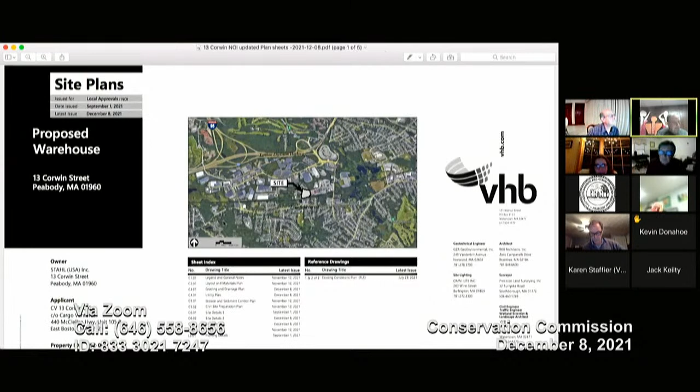I received an email from Will dated yesterday, the 7th, and I haven't had a chance to go through everything in it yet, because there are pages from Horsley Witten and pages from the peer review people. Whatever's in the OneDrive is accessible to the public and to us, but this wasn't submitted in time, and there's an issue there for me.

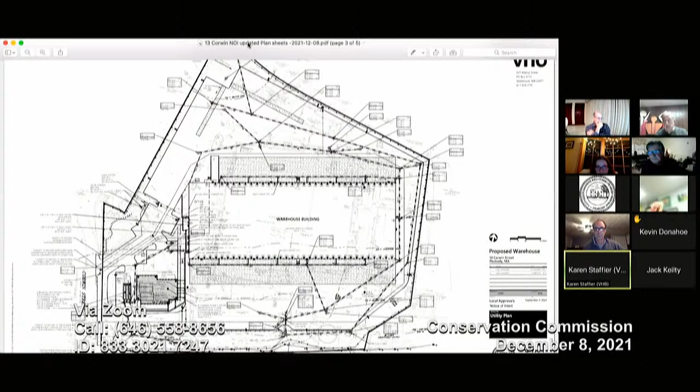Hi Karen, this is for the one you were looking for. If you scroll down towards the bottom of the page, there's a manhole. It's in the dead middle. You can see a pipe arrangement just to the left of the big circular tank that's going to be removed.

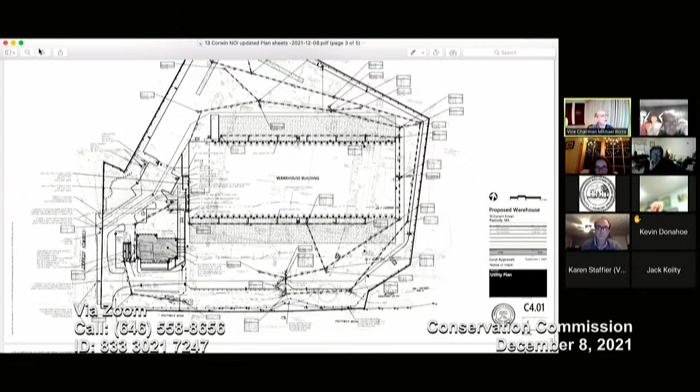If you zoom in on the bottom half of the plan, it's right near the brook, there's a little squiggle that says flow on the existing conditions. That manhole right there is the manhole in question. So you can see drain manhole 37 was the one that previously some of those just said out instead of 11 or 14.

Now each of those, for example, the first invert has a label, the invert equals, then the invert itself, then a description, and that description describes very clearly, as the commenter is asking for, what direction or what structure the pipe is coming from or going to. So for example, that first one says invert, and then it says 11. That means that's the pipe coming from structure 11 into drain manhole 37.

Yeah, that's my plans show that. The plans that I have, I have these plans. So the plan I'm looking at shows on the drainage, on the utility plan, drain manhole 37 with the outlet pipe shown in the direction. Here. Yeah. So I have this because I reviewed this stuff today.

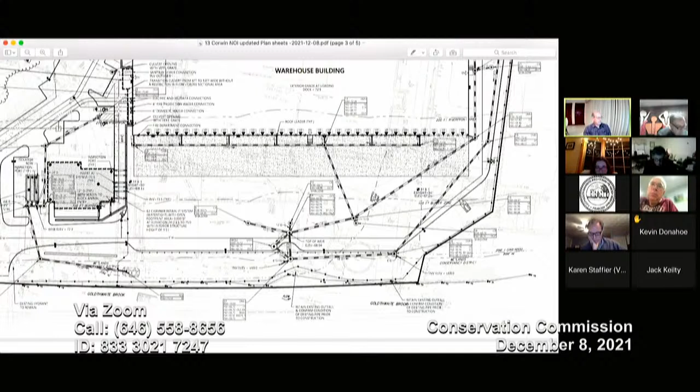Okay, not that I'm trying to speed this up, but if I could simplify it. Going through all of these comments, there's quite a few. I think I come up with eight of the comments where the final answer from Horsley Witten was not 'no further comment' - they still had either a comment or what they had asked for had not been provided. And those, if you wanted to jump to those, that one being the first one, you can stop me if I'm speaking out of turn. So standard number 2 was the first one where there was not a final no comment from Horsley Witten. The next one wouldn't come until you get down to standard number 3.

So are you going to respond to these rather than me read them? Maybe you should. Sure. So standard 3, no further comment, no further comment, no further comment, no further comment. Yeah, so I know standard number 3, Horsley Witten had no further comment.

I guess the answer was about having soil testing, and the applicant has agreed for additional soil testing prior to construction of the subsurface infiltration system, per comment number 6 of the applicant's response. And Horsley Witten has no further comment. Yep, so the reason I'm highlighting that to myself is...

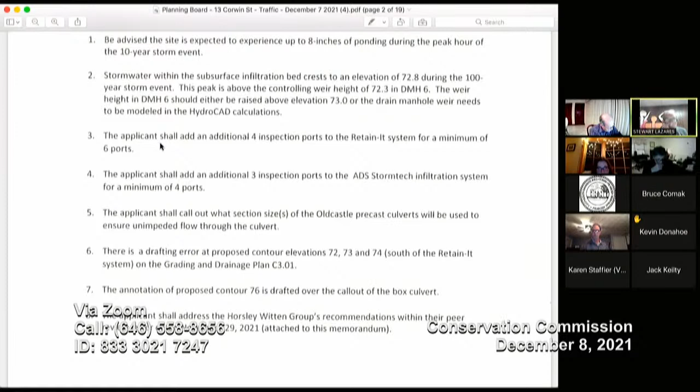What's the date of that memo? December 7th. The memo from Will is right, but this letter was completed November 29th, from Horsley Witten and WorldTech. So sequentially we responded to them, and we tried to bring that forward last meeting, but we were late in terms of deadlines for response. So we continued the matter.

Since then, Will has taken Horsley Witten's, WorldTech's, and his own comments and condensed them into this December 7th memo, which provides that if the various boards are going to act, here's the conditions. He gives 6 conditions to the Concom, and then 3 very specific conditions for the planning board, predominantly separated by traffic.

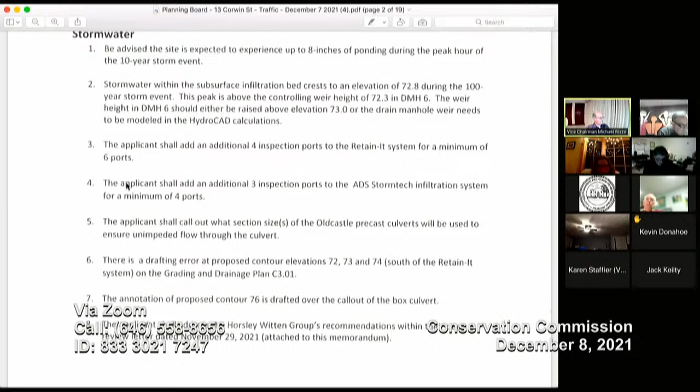I don't see the conditions from Will. Is that in the... it's on page 2 of what we're seeing here. Oh, but there's 8 items. No, under stormwater, they're right there. Department services requests that any decision issued by the conservation commission reflect the following conditions. If you count them, Michael, there's actually 6.

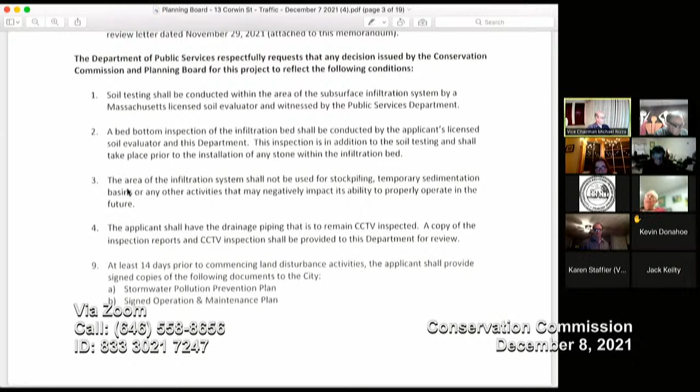The numbering is 1, 2, 3, 4, 9, and the reason for that is because up above, when he's discussing traffic, he goes 1, 2, 3, 4, and then he begins again 1, 2, 3, 4, but then jumps to what would be 9. So there's really only 6 conditions that distill down to stormwater management, plus 10 on the next page. All right, now I get it. So that's 6 total, really, plus the soil testing.

All right, let's go to... let's see. So we're on standard number 2, which is comment number 1, or condition number 1. This is stormwater management review still. Yes.

I mean, sorry, yeah, so the standard on stormwater standard number 3, the comment about soil testing is in there, and that was one of the ones that Will had put in there. So that answers that. And then down to employee parking, about the LUHPPL. Want me to address that one?

Yes, please. So we provided a clarifying water quality volume calculation that serves as the basis of that system size. They're simply requesting an additional, more detailed printout from the model that we have so they can double check that the water quality volume we're saying we're providing is actually being provided. They want to just see the detail. So we've provided that, or we're agreeing to provide that, and it was in the email from this morning attached to my revised letter. Now, is that one of Will's comments?

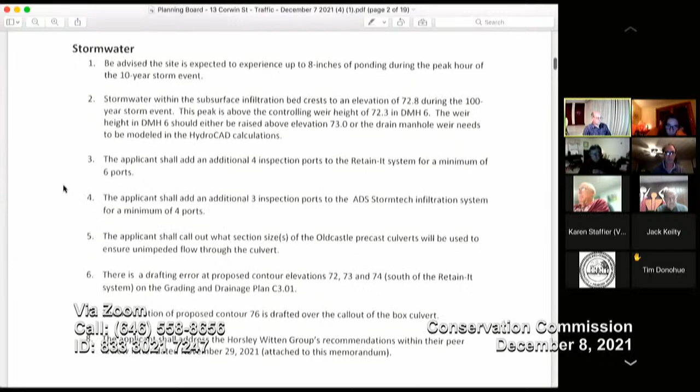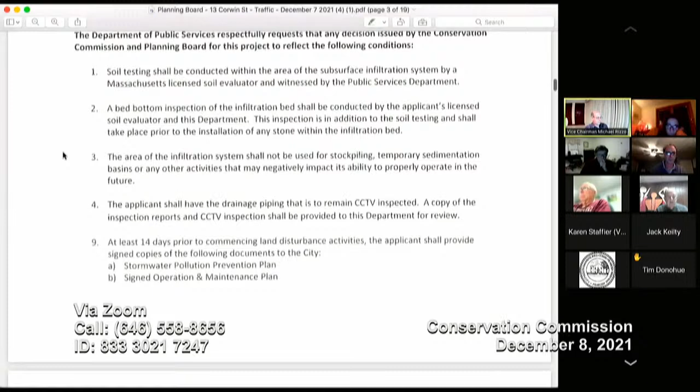So the conditions - again, we don't have to draft the conditions tonight, but the conditions would be Will's 1, 2, 3, 4, his number 9 and number 10, and then planning would be... There they are on the screen now. 1, 2, 3, 4, 9, and then there's 5, 10 on the next page as well. So there's 6. I would suggest that in other projects, if there's a discrepancy, if the planning board asks for changes, we would be obligated to come back and amend, in the unlikely occurrence that something happened that way. But from Jack's summary, that doesn't sound likely.

So is there any improvements being made to Corwin? It's outside of conservation, but just general improvements to the neighborhood? Not directly to Corwin, unless there's a necessity to resurface it at this point. We are making certain improvements to the pavement right in front of our place - it's pretty cracked and kind of decrepit. So yes, we are fixing Corwin in that area.

You go past your area - I think there's an area past us that there isn't even pavement. I'm not sure of that, but I know my car gets a lot of bounce if I go way back there, and there's a ton of trucks parked back there. So you're suggesting you'll take care of improving Corwin Street up until your property? Right in front of our property is where we absolutely must do it, and then if we're asked by other parties - but to date we haven't been asked to resurface anything beyond that.